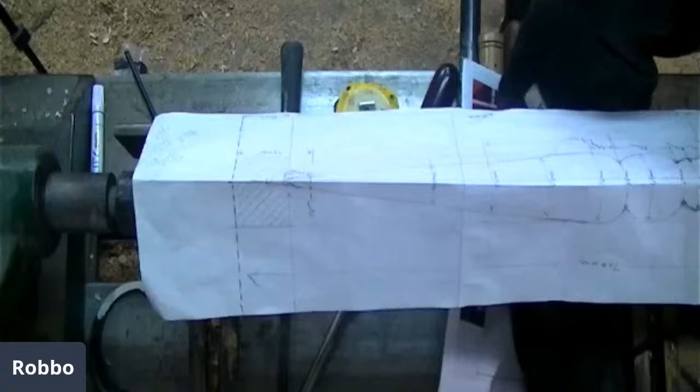Let's see. Everybody's been having a chat there today. Leona, so your brain doesn't get frazzled today, I'm on a different lathe again, alright? I'm on my big one now. So,

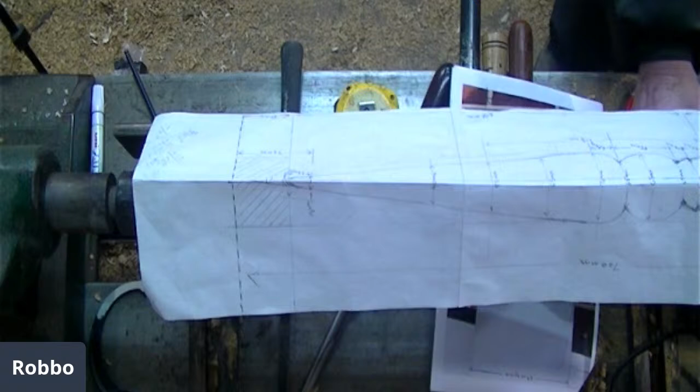Was that a train going past, Jay? No, it's not me. No, I got that. Oh, hell of a noise. There was a bit of a noise.

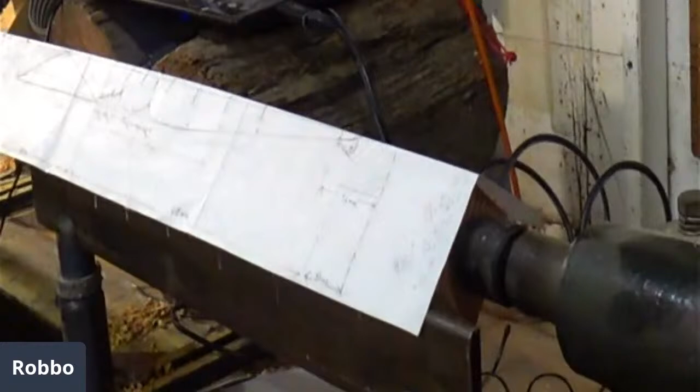From down that end there, back to here. The post is actually 1800 long. And for Fiona and everybody else that hasn't seen this, my lathe actually extends right down through here. I've got to keep an eye that I'm not going too fast, right down to that back wall down there. It's 40 feet long. So, just my little one.

Right, swing this back here again now. Put this back up on here where I want it. And as usual, folks, if you have a question, put a row of question marks in or put question, so that our earwigs in the background there, Jay and Sid, I'll just bring them up for a minute so you can see their faces.

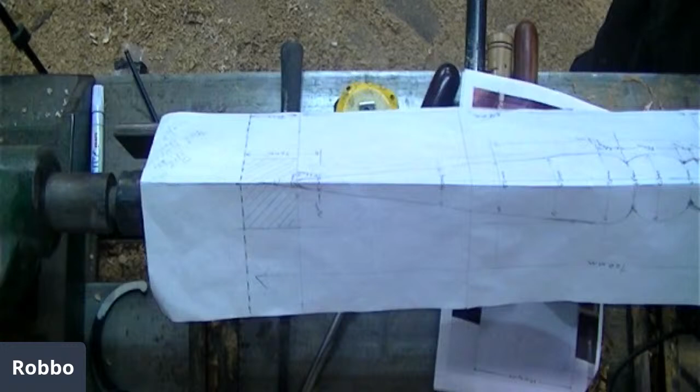Right, now with this one I'm fairly lucky. They've given me an actual scale drawing, this one here, as well as pictures of what it actually looks like.

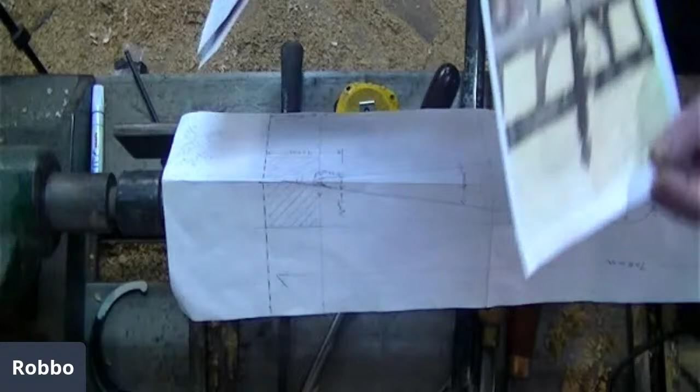Turn it around the right way, Robbo, and we'll be right. Like that, that's the bottom of the post. And I've got another one here that shows the overall of the post, so Darren's got a question, so to at least have an idea of what it completely looks like.

Yeah, I'm just getting onto that, Darren. Now this is Oregon, which I must admit I hate turning because the Oregon of late is absolutely terrible. It's got a very open grain in it, this lot, as you can see there. And in fact, the centre line falls right on a hard point there, so naturally the centre slips off the side.

Now I've centred this one, but I haven't centred it into the centres yet properly, which I'll do in a minute. Just to refresh your memory from the chair leg that we did a couple of weeks ago, how we do that.

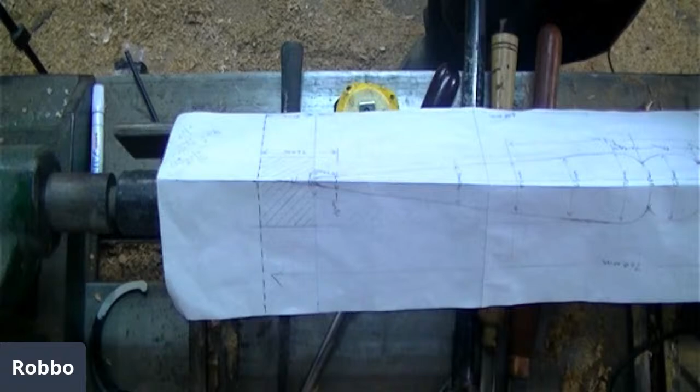Now I've already set up the calipers for most of the measurements. Normally I would guess most of these measurements. Now if you get a drawing like this that's got all the measurements on it, you can mark it out right from here and mark it back.

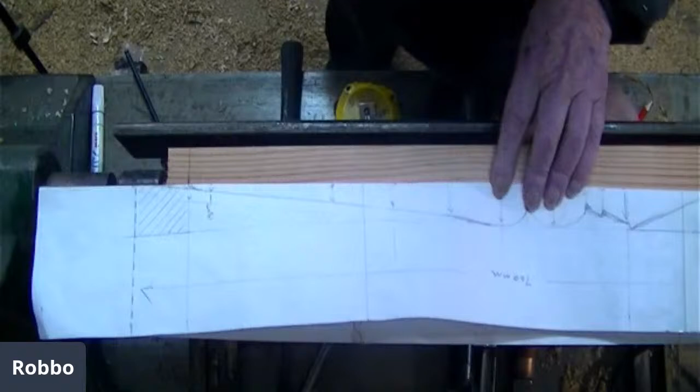But an easier way to do it is to get the plan or the drawing and fold it in half and sit it on the datum line at the base there, like so, and get a pencil and just mark where all the details are. There, there, there, and it comes in off the square here.

Then we just get a square and run the lines across.

Now in marking out, I always use just an HB pencil. I don't use carpenter's pencils because it's too easy to turn them sideways and put a heavier line in than you actually need.

And I set my drawing up behind it so that I can see what the actual shape of it is. Then I centre the post, and just to refresh your memory of how we do that.

Get our skew chisel and come into the waste part that you're turning off. Pinch the chisel between your thumb and your forefinger, like so, and rotate the post until you hit the high spots.

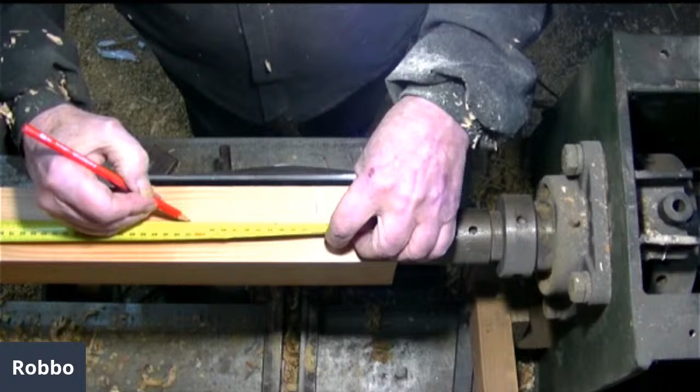Getting my tape measure, pencil, square. Now, 110. Now the ball's 65 mil, so come up 65.

But it doesn't leave, in my opinion, it doesn't leave enough for the cove in there, and the bead at the top of it.

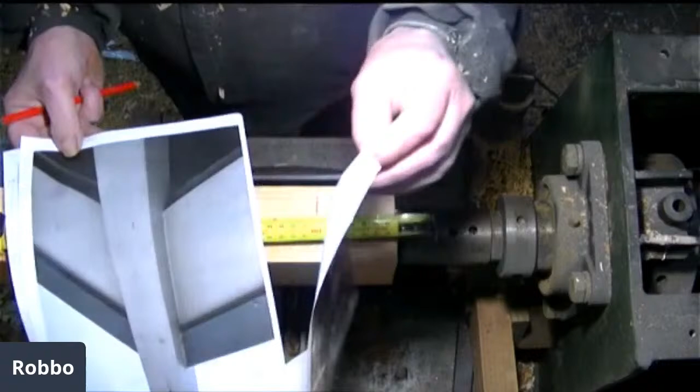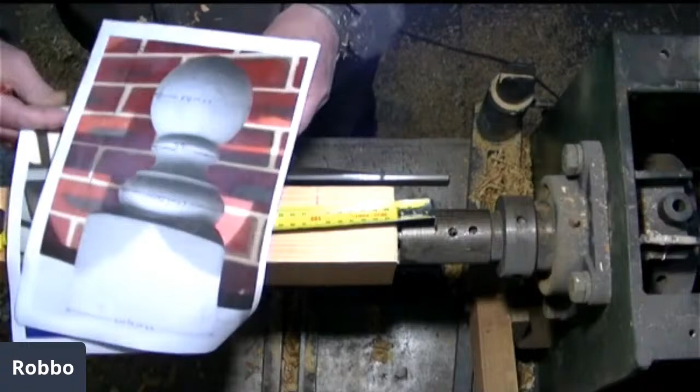Hasn't got any other drawings in there, so I just cover up that address and everything here. To me that doesn't look right. It looks like there's a little cap on the end of the ball there to me anyway.

All right, well, I'll wing it. Nick's in. Sorry? Nick is in. Oh, good day, Nick.

Doesn't gel - it's not looking right at all. I'll just check the measurement again. It's 110. He's got 110.

I've got a funny feeling. Let's just see - that's 125. Yeah, I think it's 210. I think it should be 210. Sorry, I'm half muttering to myself, but you can probably get an idea of how my brain works.

That part down the bottom here just does not look right. There's no way I can get a bead and a cove in there, the width that they're looking compared to the ball. So, 70, 30.

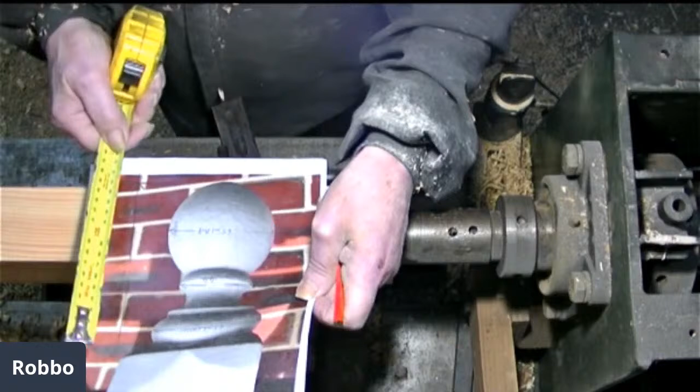What I'm doing is actually, just to give you an idea, I'm measuring the ball, right? That's 65 across, which is actually 90 in this photo here, so it's about a third bigger. If I measure up to there, that's 160 up to there.

I don't think this part's right. I think the measurements are out here. So what I'm going to do is leave this at the moment, and I'll do the top of the next post, and give him a call tomorrow to get him to measure this here again, because I don't want to muck it up on him. There's 20.

Oh, wait on, there is some writing there - 20 wide. No, still doesn't come in right.

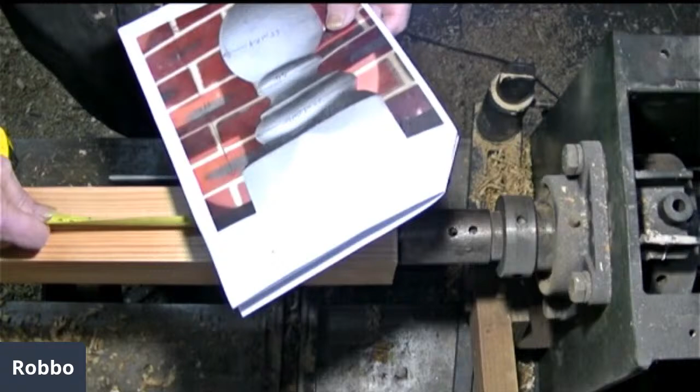Okay, so I'll give this one a miss, and I'll put the next one in. Just chat amongst yourselves for a couple of minutes.

Better to be safe than sorry. Especially when you're getting paid for it, Robbo. Sorry? Especially when you're getting paid for it.

Yeah, well, that's right. I reckon it should be about 130 to 150 long. Did you see Darren's question there, Robbo? Yeah, I'm just about to answer it. Yeah, that could well be. It's not on this picture, but I don't know where he took the picture from.

But on the one of it fixed to the house, it definitely has a little bit of a nipple on the bottom of it. I'll move it up to the camera a bit so you can see it. And I reckon that he's mismeasured it or something, so better to be safe than sorry.

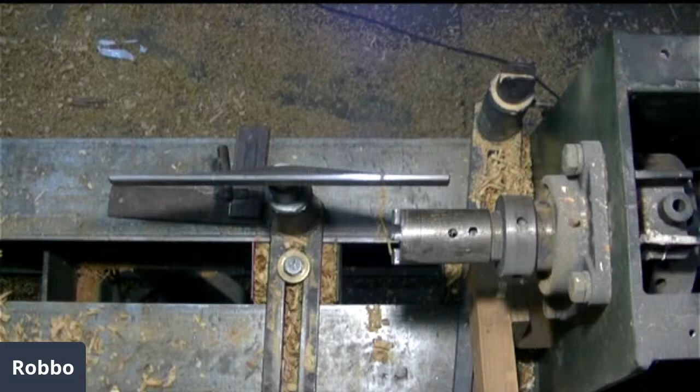So I'll whip this one out and put the next one in. I can put this one back in again tomorrow - that's the advantage of real turning.

I think Steve's crying for a bit of attention there.

Right, just sit it into the centre there. Walk my way up the post while I hold it in there. And as I said, free to rotate between points. Now I'll just measure in the thing here.

Hey Robbo, oh yeah, you have to say it like in a really demanding voice. Tell Nick to wake up. Wake up! Nobody goes to sleep on my watch.

No, Steve's got one thing right, it's not a nipple, it's a nubbity nub. I've heard that phrase used quite a bit lately.

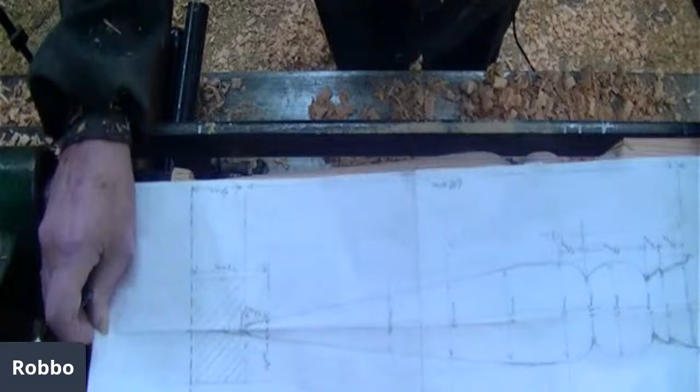Looks pretty damn close, I reckon. When it's 20 feet in the air. Yes, it does.

Yeah, I had a lathe like that too, Pete, where the sandpaper used to drop off the back. God, it was a mongrel of a thing. It's even worse when it drops down the dust extractors and rattles through the system, because sandpaper generally gets tangled up in the fan and you've got to dismantle the bloody thing to get it out so it doesn't shake itself apart.

Did you find the sandpaper yet? Sorry, what's that?